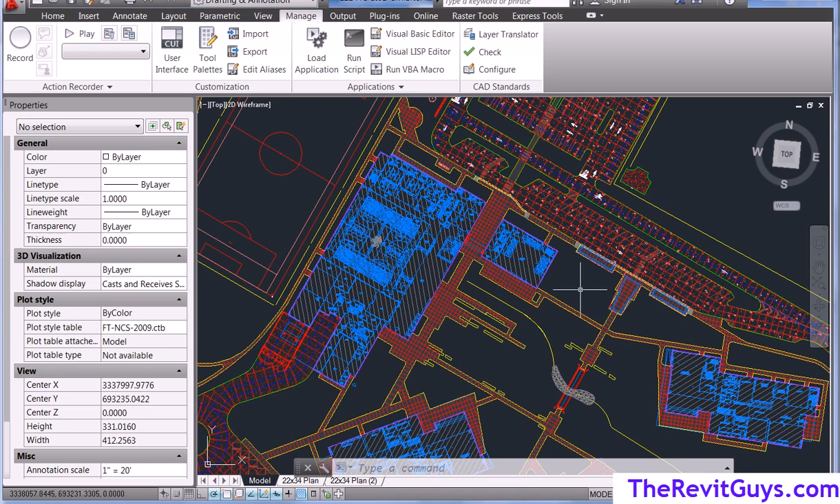Now, what we're going to do is take a look - maybe we got this little building right here, and we got this big site. I want you to notice that the site right here has got a corner. Now I'm going to zoom in on that corner, and I'm going to ID that corner.

To ID the corner, what you want to do is use a command called point, P-O-I-N-T. When you hit point, it's actually going to put a point on the object. Now you'll see there's options that pop up, PD mode 0 and point size 0. I'm going to pick the point, and there we go.

Now I'm going to type in PD mode. PD mode lets you change the value for the point. Currently the point is a single pixel, hard to see. 34, enter, is one of my favorites. It's a cool little graphic, I've been using it forever. That makes it easy for me to see it. Now, that's really not that important - you could type out different numbers and give different ones, but here we go.

I'm going to pick on it. Notice these positions - write them down. Write them down, and we're going to key them into Revit. Okay? Now you're thinking, well, can we do that?

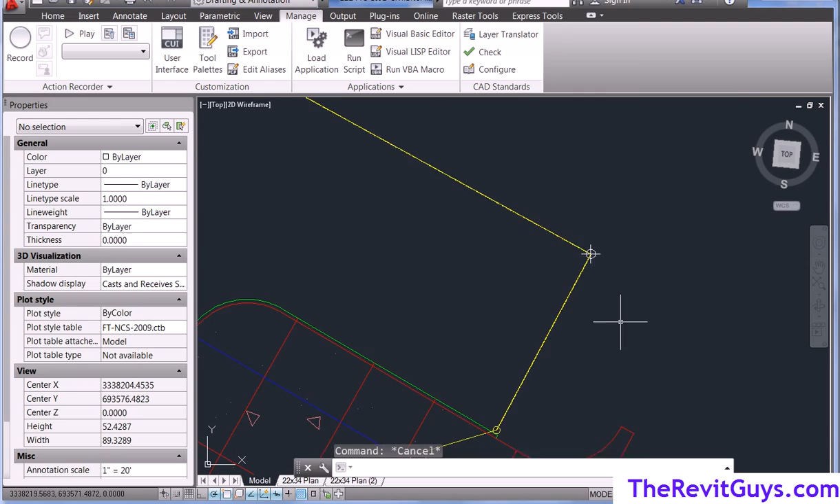Sure. Now, you may use the corner of the building, or you may use something else - you can ID whatever you want. Now, let's say I want the site to line up with this corner of the building. Okay, now we're going to really get fancy here. Now that's what I want it to line up.

So I'm going to ID that point again. Point, enter, and since I've already had the PD mode set, you see it picks it. Now I'm going to pick this, and I'm going to write that number down. So now I got the number written down, and you can see it right here. You're doing a little screen capture of it, whatever you want to do - you can even highlight the number and save it. Okay, but there it is. And that's important to us.

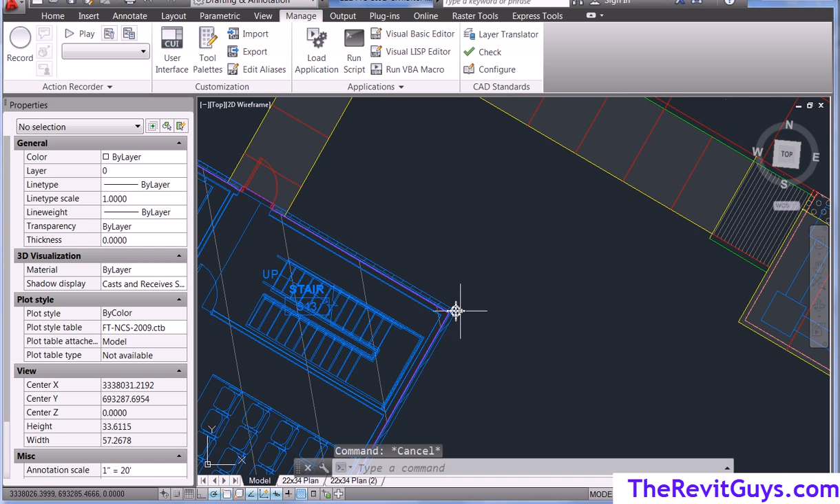Now, we're going to go to Revit, and just to show there's no smoke and mirrors, I'm going to start a new project, and I'm going to go to commercial, and boom, there it is. Okay, so it just opens up one. Now let's say we had the building in here.

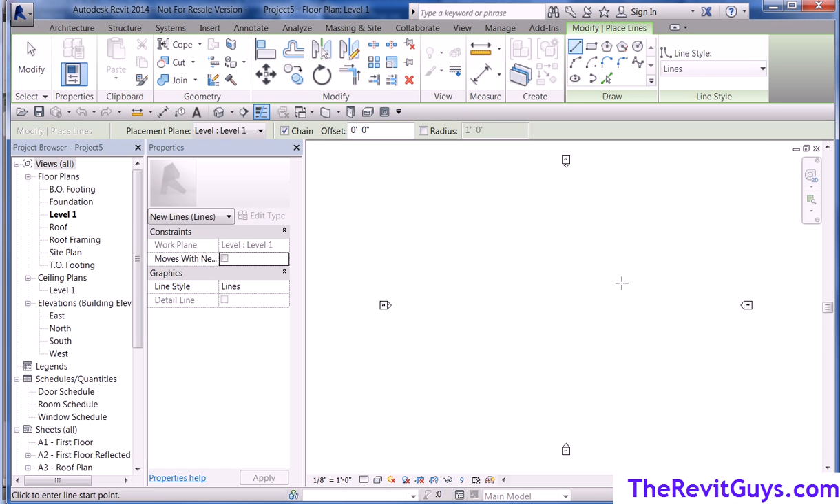Now, I really don't know the size of the building, so what I'm going to do is actually put a little L shape as a marker. I don't have a building, so I'm just going to come in here and put a little L. Let's say that is the corner of the building. Now, if I want to go draw a building in there, I could - make it like this and like that, right? But really, my main objective is to bring the site in.

So I want that to be the corner of the building. Now in Revit, if I go and reveal my markers, that's my survey point and my project point. Let me go ahead and right-click, Unhide in View Elements.

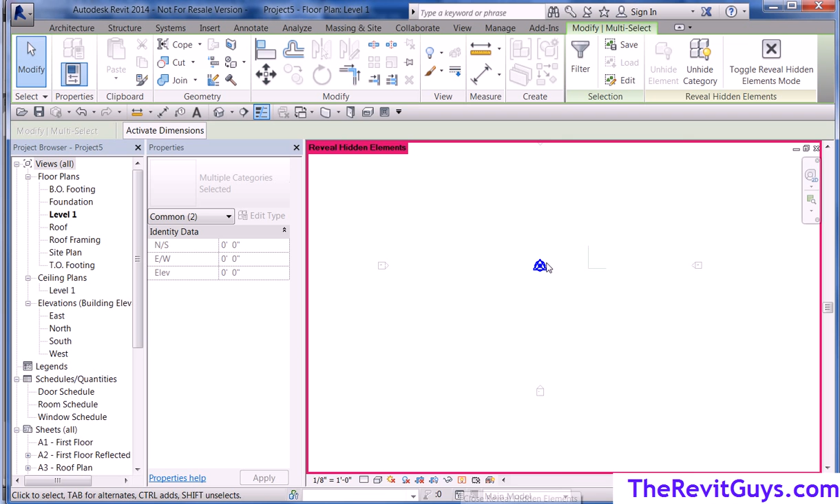Now I can see. Let's turn that off. Whoops, must have did something wrong there. Grab them. Okay, right-click, Unhide in View, categories, and hit it again. Alright, I don't know what I did there. Interesting, I must be doing something wrong. Try that again. Right-click, Unhide in View Elements, let's see if that worked.

There we go. Alright, now I have 2 points here. One's a triangle, that's survey, and one's a circle, that's project. Now here's where it gets kind of cool.

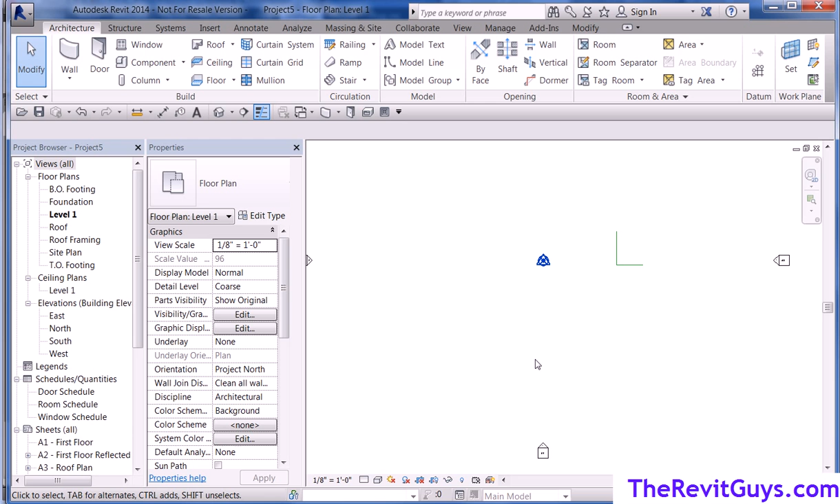I know that my survey point is like 3 million in that direction. So how do I get it there? Well, one thing I do know is this point. That is the point we ID'd. If we go back to AutoCAD and we pick on it, that is that point, right?

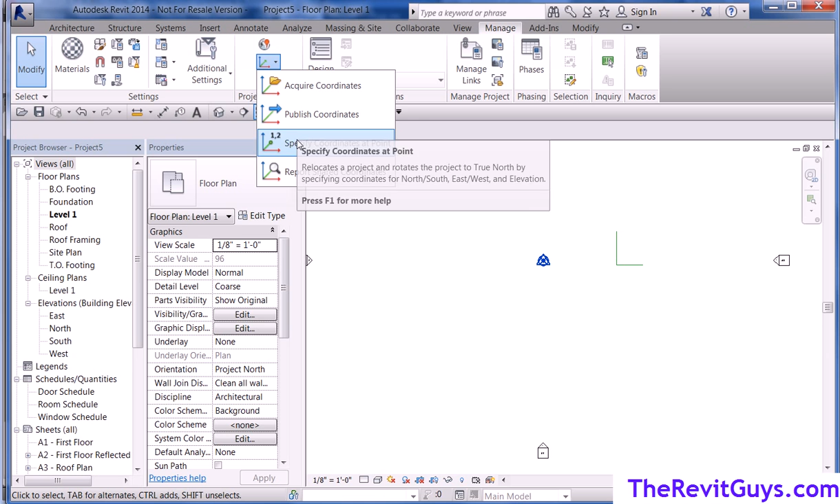Now back to Revit. What I'm going to do is I'm going to tell Revit what that point is. Here we go. Manage, drop this down, Specify coordinates at a point. Bing.

Now we type in the number. It's a big long number, so we'll just go ahead and type it in. I'm going to pause. Now I've typed the first one in, and I hit enter, and you see it converted to inches and feet. I typed the second one in, and that's in full decimal, and I click here, and you see it converts it for us. So don't panic if the numbers change. Same number, just in a different format.

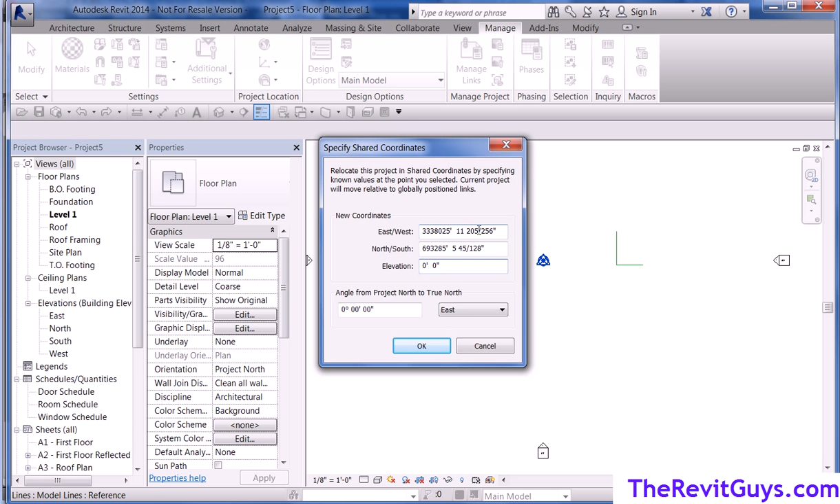Now I told Revit that point is the one in our project, and we hit enter. Now what happened is you'll notice that there's a circular point here, but the triangular one left. If I zoom out way, which I probably couldn't even zoom that far, it would show that little triangle, which is my survey point. Now here's where it gets kind of cool.

I told Revit, in essence, where 0 was, way that way. Here we go: Insert, link a CAD file. What one are we going to be? We're going to come up here and hit that plan. You see, that's the plan I was working with earlier. And this time I'm going to say use shared coordinates.

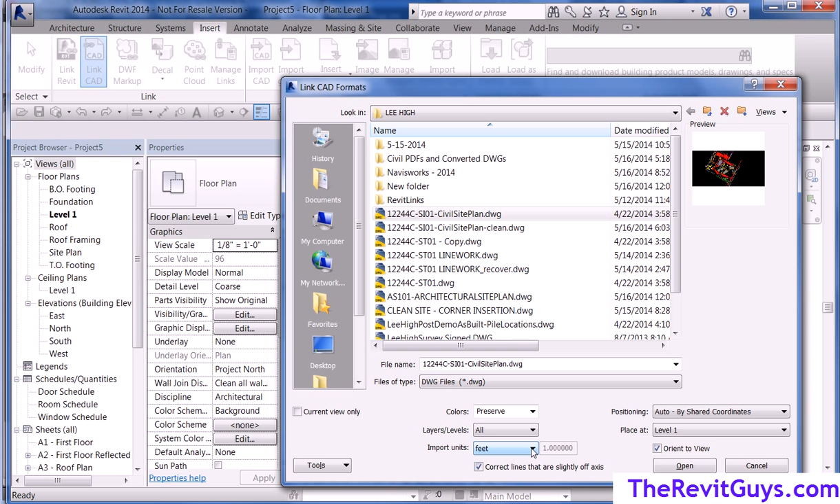At this point, if you're not sure of the units, you can change them to auto detect. Sometimes the feet and inches will get messed up when you come in from a survey. But we're going to hit open. Now Revit's going to say the geometry has extents greater than certain, exceeding the range will be truncated. That's okay, we can truncate. Hit OK on that. I'm just worried about this section, and it runs for a minute.

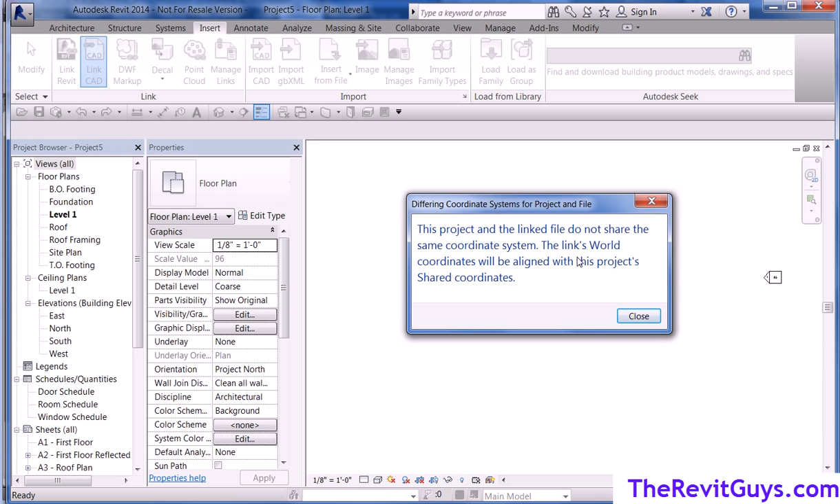Now I think I used the wrong file here, so that's why it didn't come in. Let's go see which one that was. That was the civil site clean, would have brought that in. So let's go run that one. Let's see, civil site plan, I think it's clean. Let's go ahead and drop this down, Save as. Yeah, cancel. All right, we'll just do that one too.

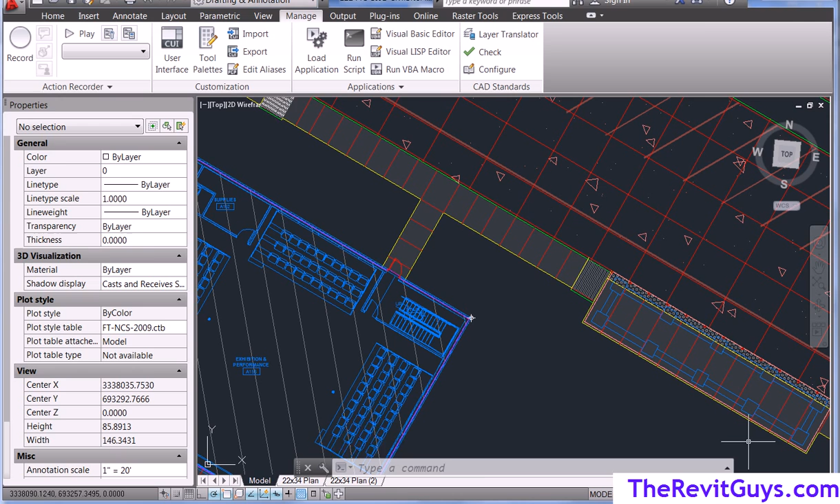Let's go back to Revit, but you got the idea. Let's go ahead, I'm going to grab this guy, I'm going to delete him out, and we're going to drop this down. Oop, wrong button. Insert link CAD, the clean one this time.

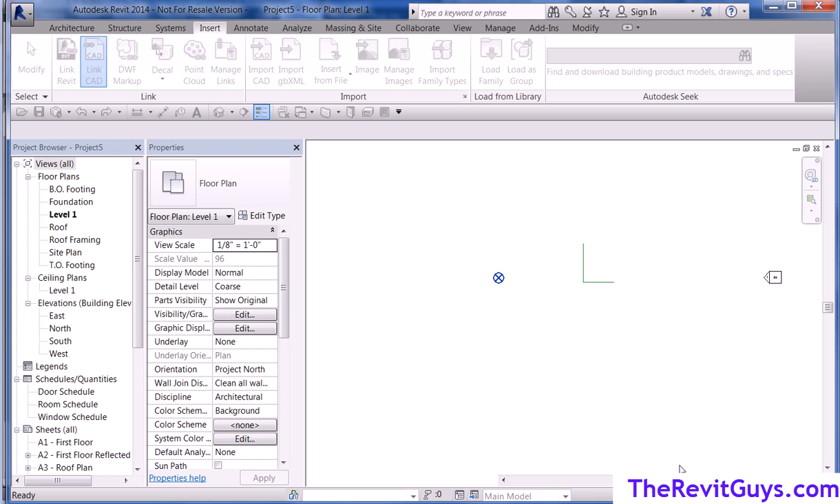And again, I'm going to go with shared coordinates. Hit OK on that. Again, it's going to go through the same properties, except it may have cleaned it up a bit because we had it on earlier. Hit OK on that, and bammo. Notice where it landed, dead on. So there we go, that is how you nail your sites down in Revit.